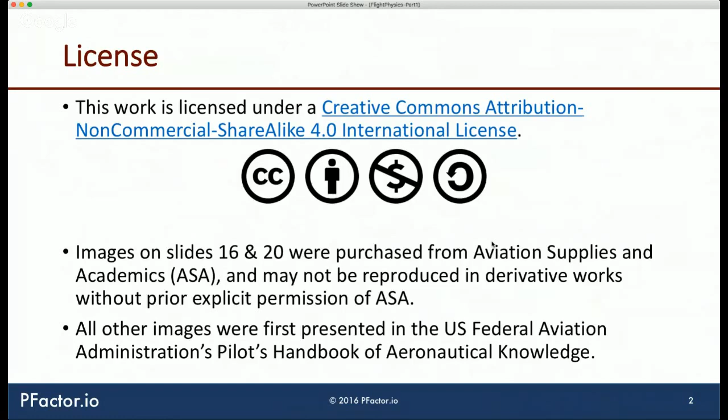All right, so before we get started, a little bit about me. I'm a Los Angeles area-based resident, originally from India, commercial pilot and AGI, also working on my CFI. Hopefully in the next quarter or so I should have my CFI. Been an av geek, huge fan of airplanes, flying, and aviation for as long as I can remember. My dad used to work for Indian Airlines, and growing up I remember actually going to the airport. In those days you could walk up on the tarmac to the aircraft, and I remember smelling burnt jet fuel. Even to this day, when I smell jet fuel, it has a nostalgic memory to me. It's kind of weird, but that's the way it is.

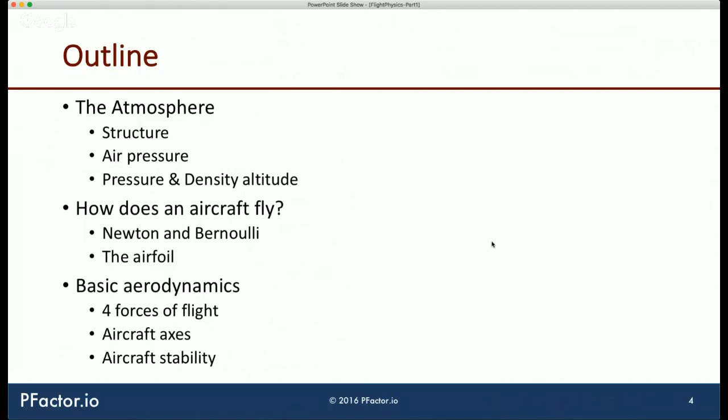So what is the atmosphere? And before we answer that, maybe there's a bigger existential question here. I'm a Star Wars nerd, so you're going to see a lot of Star Wars stuff popping up, bear with me. There's this big statement that Obi-Wan Kenobi said in Episode 4, where he says something like, 'The Force is an energy field created by all living things. It surrounds us, it penetrates us, and it binds the galaxy together.' Sometimes, rather irreverently, I wonder if he's just talking about air. Because air actually surrounds us and penetrates us, and maybe it doesn't bind the galaxy together, gravity does. But at the end of the day, air is all around us.

So let's talk a little bit more about what air does, what the atmosphere is all about. The atmosphere itself is an envelope of air that surrounds the Earth, and it rests upon the surface of the Earth. The atmosphere, or air, is a mixture of gases, predominantly nitrogen and oxygen. The air is about 78% nitrogen, about 21% oxygen, and about 1% all other gases. At least the FAA figured out how to add all of these up so it totals 100%, which is pretty cool.

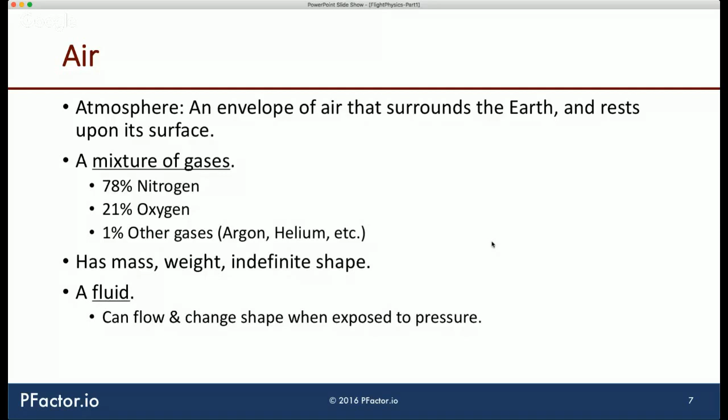All right, so continuing on. Because air has mass, it exerts a force. And because it's a fluid, this force is exerted equally in all directions. That force over a unit area is called pressure.

When you're filling up your car tires, you normally fill them to, say, 32 psi, and psi is a unit of pressure — pounds per square inch, a force per unit area. The same way, pressure exerted by the air is measured in a unit known as inches of mercury, or in millibars.

So what exactly does inches of mercury mean? Let's talk about that. The earliest measurement of atmospheric pressure was by this guy called Torricelli, an Italian inventor, who realized that by sticking a capillary within a fluid, the pressure exerted on that fluid by the atmosphere forces the fluid into the capillary to a certain height.

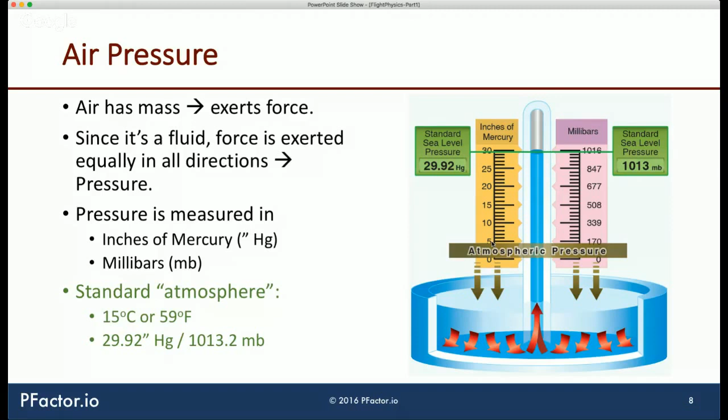So just remember: air at sea level, 29.92 inches of mercury, 15 degrees Celsius. All right, so some rules of thumb.

We all know this instinctively: as we climb higher in altitude, the temperature of the air surrounding us goes down, and the pressure of the air also goes down. Air pressure goes down because there's less air above us — the higher you go, the less air there is, therefore less weight or mass impacting us, which means less pressure. These are two rules of thumb that are very common and should be memorized. It's not very difficult, so it's easy to memorize.

The standard temperature lapse rate is 2 degrees Celsius for every 1,000 feet in altitude. In other words, let's say we're at sea level on a standard day and the temperature is 15 degrees Celsius. Climb 1,000 feet, and the standard atmosphere is expected to be at 13 degrees Celsius, 2 degrees Celsius less. At 5,000 feet, the standard atmosphere air should be at 5 degrees Celsius, and at 10,000 feet it becomes -5.

So just keep 2 degrees Celsius for every 1,000 feet in mind. The standard pressure lapse rate is 1 inch of mercury for every 1,000 feet. So it's fairly easy: temperature goes down 2 degrees for every 1,000 feet, pressure goes down 1 inch for every 1,000 feet. So once again, if air at sea level is at 29.92 inches of mercury, at 1,000 feet the air should be exerting a pressure of 28.92 inches of mercury. Just memorize these numbers — you're going to use these.

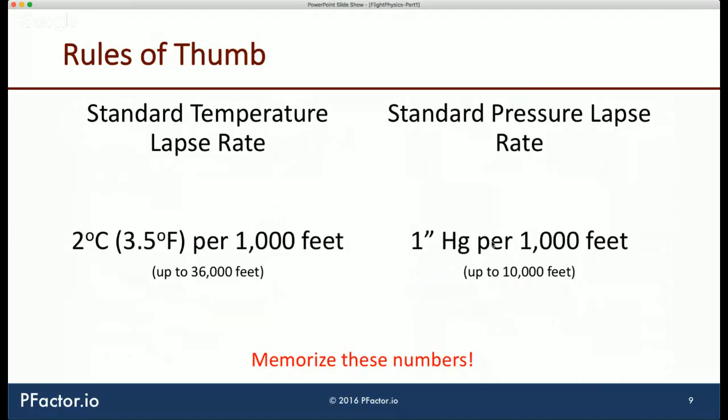All right, so we're going to dive into a couple of concepts. I'll talk about them briefly today. I suspect we might cover them in more detail when we get into aircraft performance, maybe 4 or 5 sessions down the line. But let's talk about these today because the next slide, density altitude, is more relevant to our discussion.

In aircraft performance, or talking about the atmosphere and air, there's a concept called pressure altitude. That's really the height above a theoretical level called the standard datum plane. There is no standard datum plane in the world — you won't walk around the Earth's surface and find it. It's a theoretical, imaginary level that someone made up. The standard datum plane is a point at which the atmosphere exerts a pressure of 29.92 inches of mercury.

Depending on how atmospheric pressure changes — which could be above, below, or at sea level — it's rare that at sea level conditions are exactly standard. In fact, it's more common that they're not, because of what's happening in the atmosphere above us. We talk about low pressure and high pressure, and depending on conditions on a given day, it's possible that the standard datum plane moves.

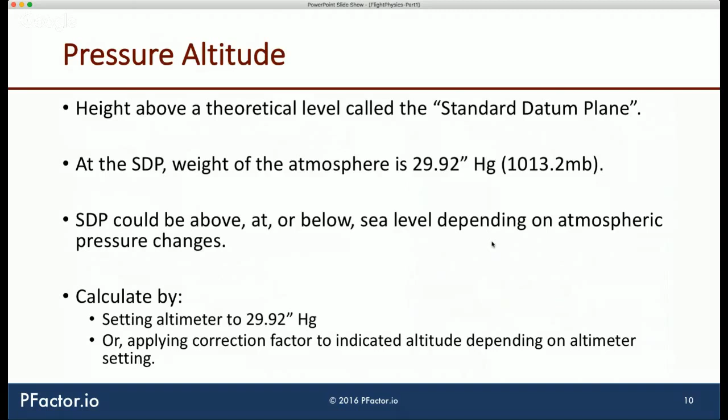The easiest way to calculate your pressure altitude is by setting your altimeter inside the aircraft to 29.92 inches of mercury, or 1013.2 hectopascals. The other way is to apply a correction factor to the indicated altitude depending on the altimeter setting. We'll cover this in pilot math or performance math, whatever that session is called — just keep this in mind, I don't want to delve into it too much today.

The reason pressure altitude is important is because it's used as the basis to calculate something called density altitude. I'm going to talk about density altitude because it can get a little confusing, so let me explain it in more detail.

The density of air varies with temperature, humidity, and pressure, and by the largest extent it varies with temperature. The hotter it is than standard temperature, the less dense the air — it's thinner. The colder it is than standard, the more dense the air becomes — it's thicker or heavier. So air that's hotter than normal is less dense, and air that's colder than normal is more dense.

This change in air density impacts how an aircraft performs. Less dense air makes the aircraft perform worse — power is reduced because the engine takes in less air. Less dense air means fewer molecules per unit volume, so as the aircraft flies, the engine takes in less air and there's less thrust. Think of the propeller as trying to bite through this fluid called air — as the air gets thinner, the propeller becomes less efficient. Finally, lift is reduced because thin air exerts less force on the airfoil.

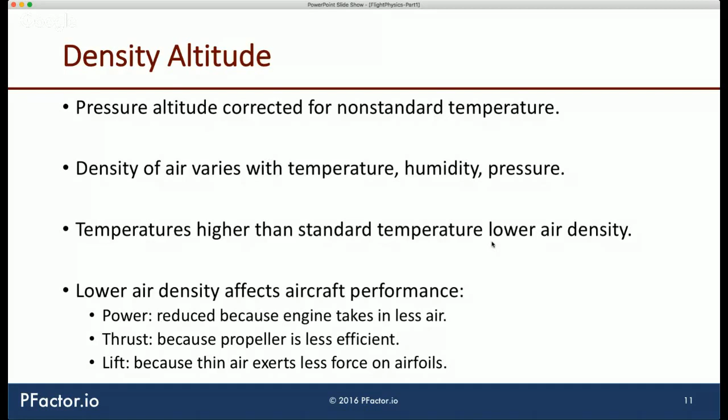All right, so that brings us to the end of this whole thing about the atmosphere. Now that we figured out what air is all about - the fact that it has a density, it exerts a certain pressure, and the hotter it gets, the air actually exerts less pressure and is less dense, which affects performance - we've kind of covered all of this.

So let's talk about how an aircraft flies. In the old days, it was probably just magic, but whatever it is, an aircraft flies a certain way, and an aircraft flies by generating lift.

This is a meme that's been making the rounds on the internet for a while. It comes from a gym meme with all these pictures of really buff, bulky guys lifting weights, making fun of a scrawny little guy, kind of like Screech from Saved by the Bell. It's the same thing here - a gigantic aircraft looking at a small one saying, do you even lift? And sometimes I wonder.

I fly a little Cessna, not a 152 like this one, but a 172. And I wonder, how does it generate lift? What is this thing and how does it fly? I know a lot of people have this question. I have friends who have expressed severe doubts that an aircraft should even be flying at all - it just feels unnatural to them.

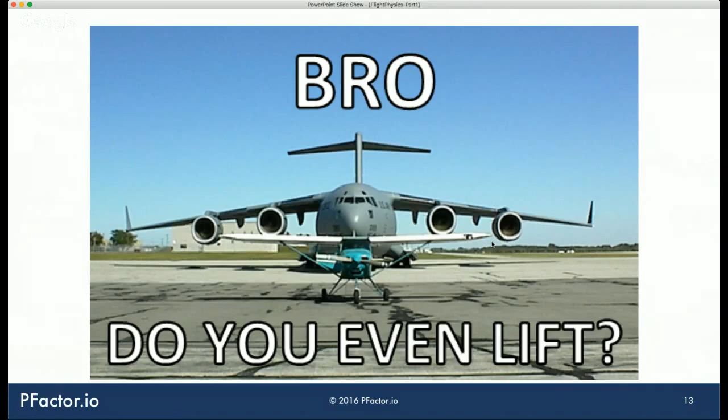So how does an aircraft generate lift? Before we talk about how it flies, let's talk about what makes it fly. The main component of an aircraft that makes it fly is this thing called an airfoil. The airfoil is basically a shape that, when it moves through a fluid or through air, causes the generation of an upward force that's called lift.

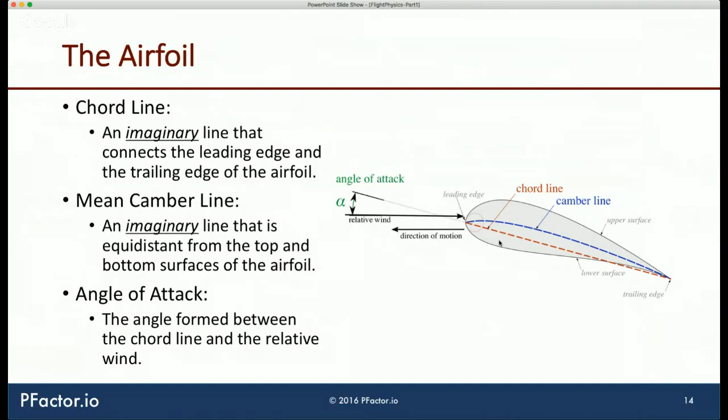It's imaginary, it helps characterize what the airfoil looks like. The other imaginary line people typically use when referring to airfoils is called the mean camber line. The camber is how curved the airfoil is, and the mean camber line is an imaginary line that's equidistant from the top and bottom surfaces of the airfoil. In general, the higher the camber of the aircraft, the more lift it generates, so the higher its coefficient of lift. Just keep that in mind.

These two definitions typically come up on the test, or at least one of them. The chord line invariably shows up on the test, or at least your DPE will probably ask you this on your check ride, so keep that in mind.

Now, as the airfoil moves through the air, there's a certain direction of motion it has. In this case, I've got the airfoil moving horizontally from right to left. The wind that hits the airfoil is parallel to the direction of motion, but in the opposite direction. So if the airfoil is moving right to left, the wind hitting it is effectively flowing from left to right.

That wind is called the relative wind because it's relative to the direction of motion. The relative wind is always parallel to and in the opposite direction of the aircraft's direction of motion. So if the aircraft's climbing, the relative wind comes from the top. If the aircraft is descending, imagine the relative wind hitting the wing parallel to the direction of motion, but from the bottom.

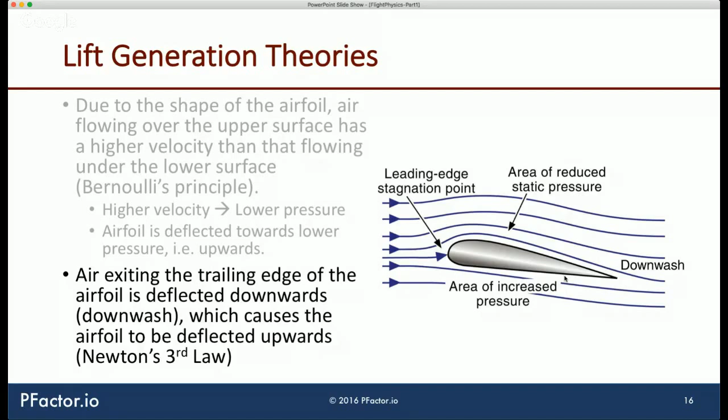All right, so we've kind of covered everything we needed to about lift, at least as it pertains to a private pilot syllabus. There's not a whole lot of difference actually between this and the commercial syllabus, but just wanted to let you guys know.

So let's continue into aerodynamics, which sounds really big and all of that, but the reality is we're talking about the forces of flight and how they impact flight.

So there are four forces of flight. We've already looked at one, which is lift, and that's the upward acting force that opposes the weight of the aircraft. The weight of the aircraft, there's not a whole lot to talk about. It's the physical weight of the aircraft, its occupants, its fuel, and everything else.

So the aircraft typically has a certain weight. When you put people into it, it has more weight. When you add fuel, it has more weight. All of that together is just called the weight of the aircraft.

Important to note that the weight of the aircraft is always presumed to act through a point on the aircraft called the center of gravity. The same way, lift on the aircraft is presumed to act through a point on the airfoil or the wing called the center of pressure or the center of lift.

All right, so then the other two forces. We talked about the vertical forces, the horizontal forces. So we have thrust, which is the force that causes forward motion of the aircraft, typically generated by the engines or the propeller, and this results in airflow over the wings.

And then there's drag, which opposes the forward motion of the aircraft. That's a real drag, though. Sorry, I couldn't resist that joke. I had to make it. But the fact is, drag is a rearward force that opposes forward motion of the aircraft.

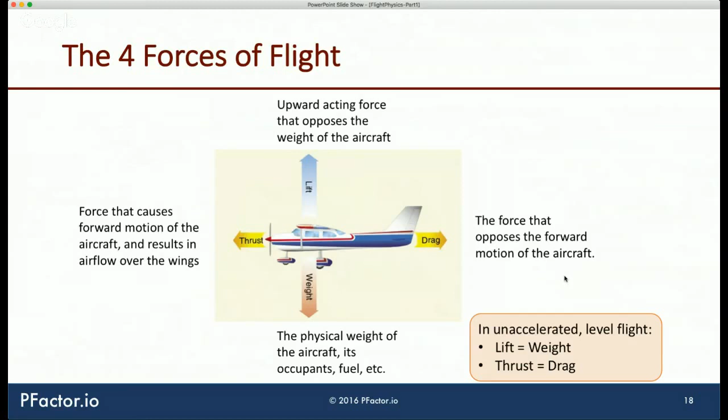All right, so continuing on, and I'm going to speed up a little bit because I can tell that I'm starting to run low on time here. So let's speed up a bit. That's a good point, I was looking at the time saying, okay. Yeah, all right, let's go.

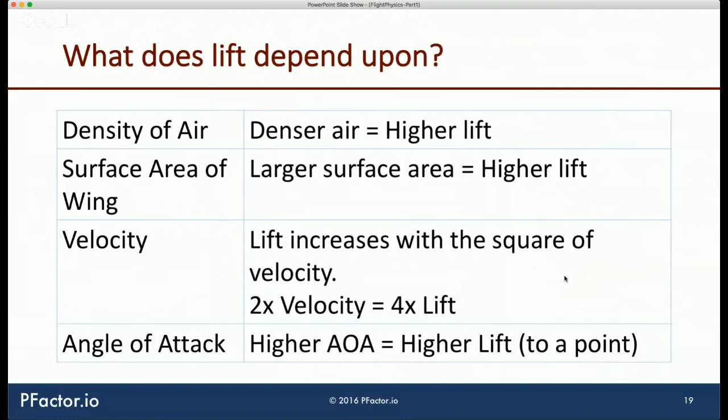So what does lift depend on? And I'm talking about lift here mainly because lift really depends on a few factors: the density of air, we talked about this, the surface area of the wing, the velocity, and the angle of attack. And the higher the angle of attack, the higher the lift, to a point.

It's actually a reduction in lift, not like the wing has lost complete lift and now is down to zero, because if that happens, the aircraft will come plummeting out of the sky. That's not going to happen. There's a small reduction in lift because of that. So remember that a stall occurs at the same critical angle of attack regardless of any other factors, and at this point the airflow is basically separated from the top of the airfoil.

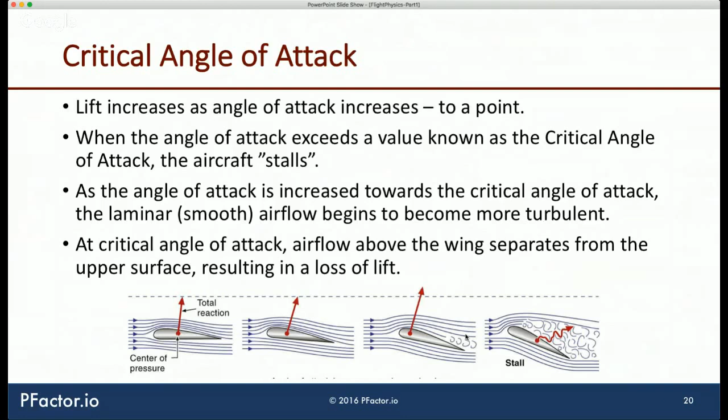Now the other force we want to talk about—we've already talked about weight, and thrust we'll cover in another presentation about the propeller and things like that. So let's talk about the other force that impacts an aircraft: drag.

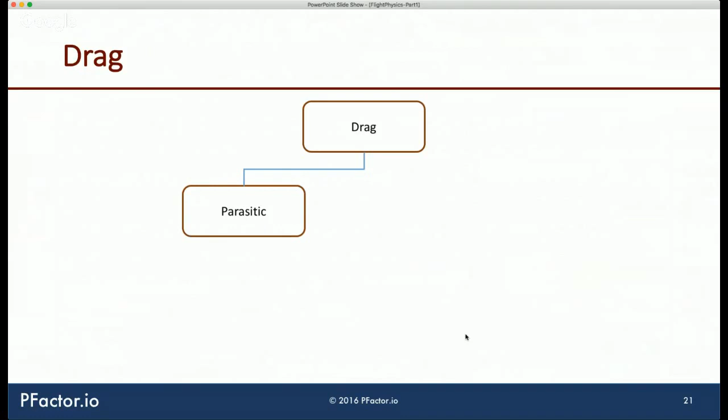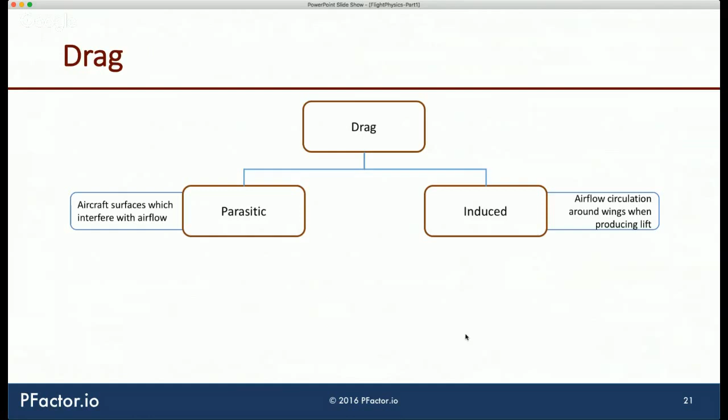Drag is a rearward acting force, and it has two components. There's parasitic drag, which is caused when the aircraft surfaces interfere with the airflow. And there's induced drag, caused by airflow circulation around the wings when lift is produced. Induced drag, in a way, is a byproduct of the production of lift itself.

Parasitic drag itself has three parts. There's form drag, which is due to the shape of objects that protrude into the wind. A typical general aviation aircraft has all kinds of things that protrude into the wind—we have the wings, obviously, but we need those, and we also have the landing gear. In many aircraft, the landing gear has a fairing on it, something very streamlined in shape, to minimize form drag, because the more streamlined the shape, the less drag it causes.

There's interference drag, which occurs when varied currents of air meet and interact. For example, there's air flowing over the wings, but also air flowing over the fuselage, and small eddies form when the air at the wing root meets the air flowing out of the fuselage, causing a bit of drag. It's called interference drag—air that's interfering with each other.

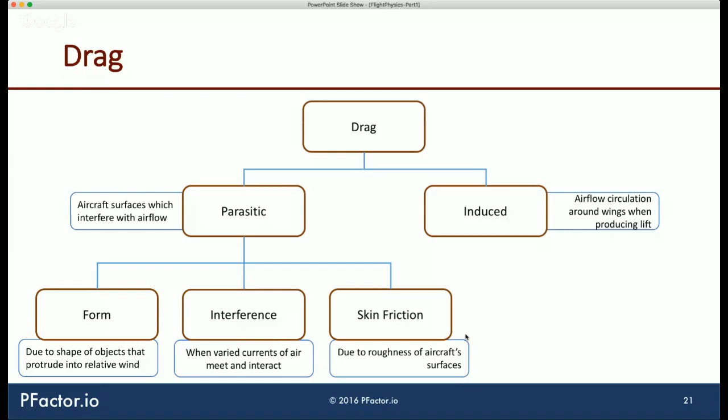And finally, skin friction drag, which is due to the roughness of the surface. Any surface, no matter how smooth, has a certain amount of roughness due to inherent friction and molecular level imperfections—that's what skin friction drag is about. So again, induced drag is a byproduct of the production of lift.

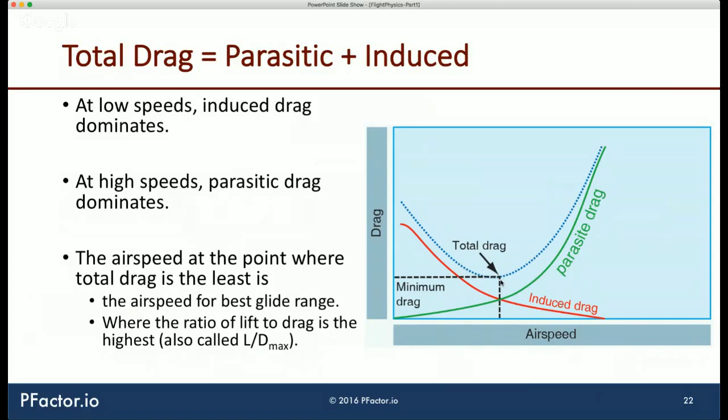This is the airspeed at which you get the best glide range. If you look at your pilot's operating handbook, many times it says that as soon as you have an engine out, pitch for best glide. Best glide is basically when total drag is the least. Typically, in my Cessna 182, it's about 79 knots—there's a certain number in your pilot's operating handbook. So keep that in mind.

All right, so we're done with the four forces of flight—we talked about lift, drag, and we know what weight and thrust look like. Let's talk about what makes an aircraft stable, because this is important as we study further. An aircraft is inherently stable, or most of the GA aircraft we have are inherently stable, because if they weren't, they would be horrible to fly.

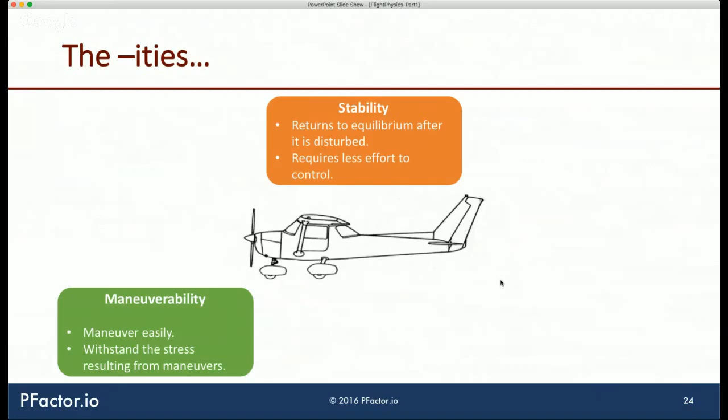Before we get into what stability means, there are what I call the three -ities. There's stability, which is the tendency of an aircraft to return to equilibrium after it's disturbed—you push the nose down, and the aircraft tends, as soon as you release the yoke, to come back to level flight attitude. There's maneuverability, which allows the aircraft to be maneuvered easily and withstand the stresses that result from these maneuvers.

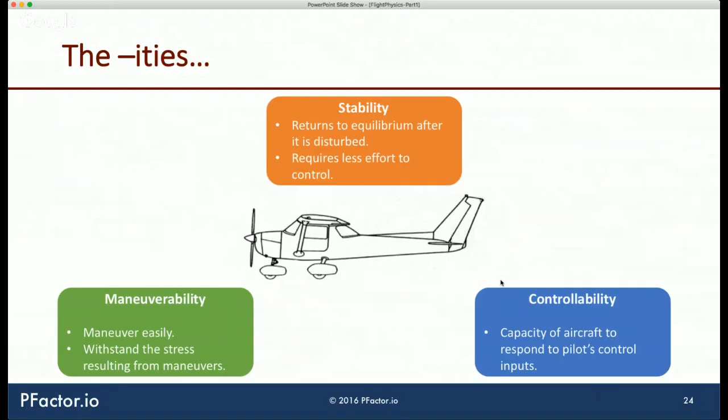There's controllability, which is the capacity of the aircraft to respond to control inputs. So if an aircraft can basically do a snap roll as soon as you turn the ailerons, that means the aircraft is more controllable than another aircraft like a Cessna that might take longer to turn.

Stability of an aircraft is expressed along three axes. This is common knowledge, so I'll quickly run through them. There's a pitching axis, where the nose and the tail basically go up and down along an axis parallel to the wings, called the lateral axis of the aircraft. The pitching moment is controlled by the elevator. You pull the yoke towards you, the elevator goes up, causing the aircraft to pitch up.

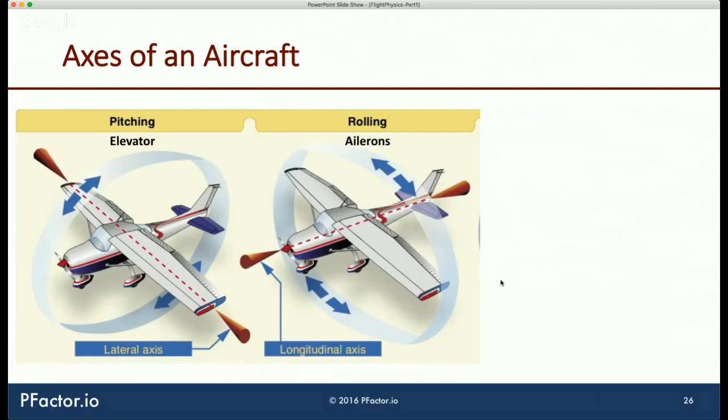You push the yoke away from you, the elevator goes down, causing the nose to go down. There's a rolling moment, affected by the ailerons. That rolling moment is around the longitudinal axis, an imaginary line that goes from the nose to the tail of the aircraft. The rolling moment is when the wings turn towards the right or the left, depending on how you rotate the yoke. Finally, there's the yawing moment, the motion of the aircraft about the vertical axis, which is a line starting at the top of the aircraft all the way down and out at the bottom. The yawing moment is what makes the nose turn left or right when you move the rudder.

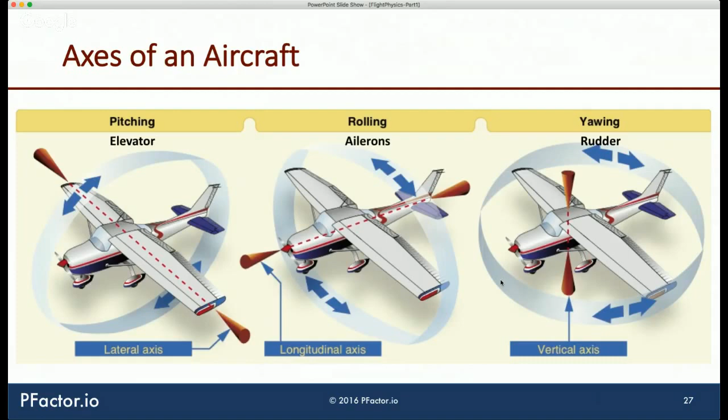Now, there are two types of stability we always worry about. The first is static stability, the initial tendency of an aircraft to come back to equilibrium. In other words, you push on an object, and if it immediately wants to come back to its initial resting place, that is called static stability. Dynamic stability, on the other hand, is the tendency of an object to come back to equilibrium after a period of time. So you push an object, it wobbles around, and eventually it comes back to rest. That is what we call dynamic stability.

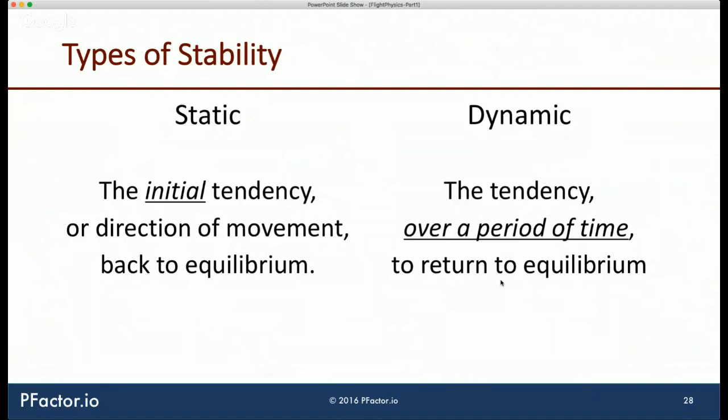Now if you lay the glass on its side and try to push it, the glass basically rotates about an axis and ends up at a point, but it's never going to try and come back to that initial position just because of the way it is. We call that neutral static stability, because the object isn't coming back to its original position, it's staying at the position to which it was displaced.

Finally, let's say you've got a glass with a narrow bottom and a really wide top, and you push on that glass — most likely it's going to wobble, but most likely it's going to tip over. That we call negative static stability. In other words, the object does not even want to come back to equilibrium. It has a tendency to diverge from equilibrium and go to a completely different state. It doesn't even want to try and correct itself, and it goes to a state that's unstable.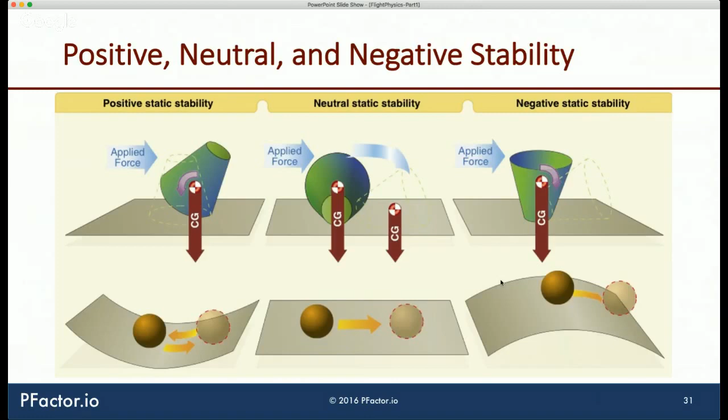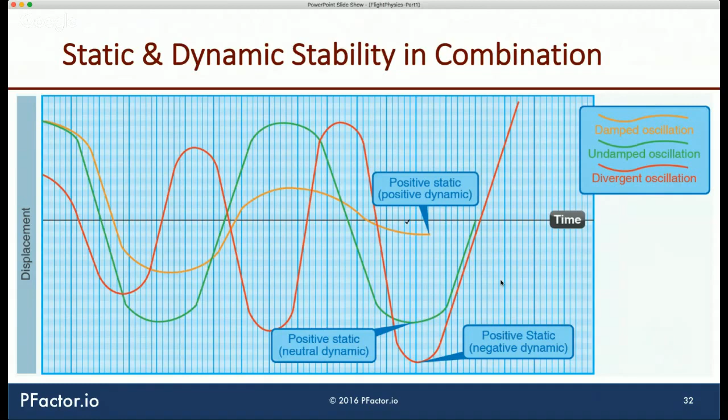So a combination of these two things — we can talk about static and dynamic stability. The reality is most aircraft are built to have what we call positive static and positive dynamic stability. In other words, when you disturb them from equilibrium, there is an immediate tendency for them to come back to equilibrium. But even if that tendency causes some oscillation in their movement, over time that oscillation gets dampened out. You can observe this often in aircraft, especially GA aircraft, where if you push the yoke forward and release it, the aircraft will oscillate a little, going up and down for a few minutes, and then eventually it comes back to a level flight attitude, same airspeed and all of that. Ignore the fact that it's a complicated looking graph, but that's basically what it's saying.

So there are three types of stability, one along each of the axes of the aircraft: longitudinal stability, lateral stability, and directional stability. Longitudinal stability is stability around the pitching of the aircraft and is probably the most important.

What that means is when the aircraft's nose is pushed down or up, there's a tendency for the aircraft to come back to a level flight attitude. It's determined primarily by the position of the center of gravity with respect to the center of pressure, or center of lift. We'll explore this further in another session, but for now just remember that the center of gravity and its relative position with regard to the center of pressure or center of lift is what determines this.

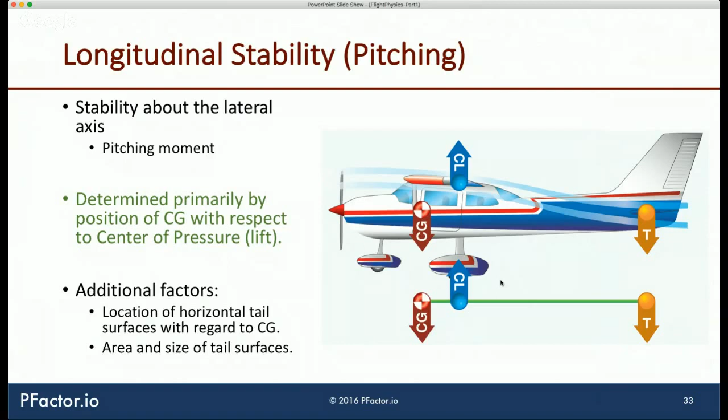And what helps in longitudinal stability is the horizontal stabilizer. So we've got the wings that generate lift, and the horizontal stabilizer that basically aids in longitudinal stability. The way it does that is by generating a load on the tail, or on the empennage of the aircraft, depending on the airflow that flows over it.

Now let's say a gust of wind forces the nose of the aircraft upwards, so the speed starts to come down. What automatically happens is that because the airflow over the horizontal stabilizer goes down, it has a tendency to reduce the load it generates, or generate less load. Because there's less load, the aircraft now is going to try and push the nose back downwards, thereby accelerating and trying to return back to that level, the same speed and a level flight attitude.

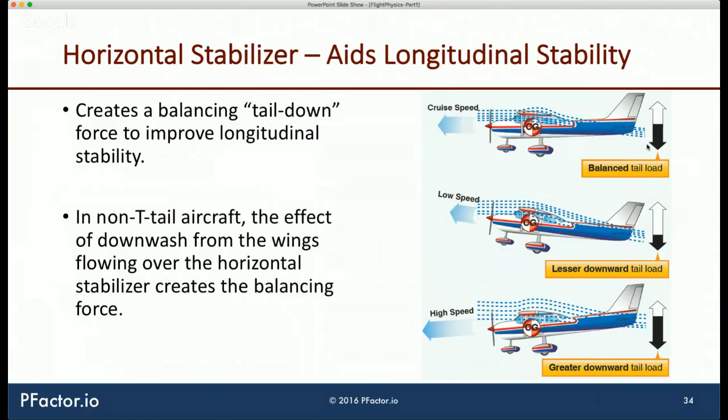Now rolling - that's lateral stability, which is around the rolling axis. This is when the wings are turned to the right or left by the ailerons or by a gust of wind. There is a certain stability there in the aircraft too - you'll find that the aircraft tends to want to return to a level flight attitude.

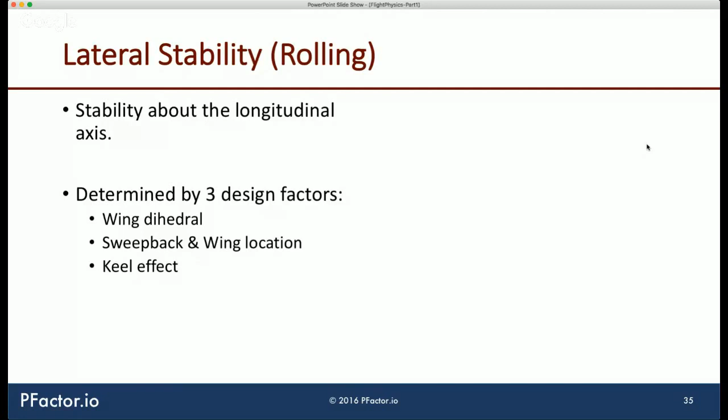It's determined by three design factors, but the one we'll talk about most right now is what's called the wing dihedral. If you look at most aircraft, you've probably wondered, especially in low-wing aircraft, the wings are basically not horizontal - they are inclined upwards at a certain angle from the horizontal plane. That angle or inclination of the wings upwards is called a dihedral.

When that happens, the wing on the left, the descending wing, essentially now has an increased angle of attack because of the dihedral, and so it has slightly increased lift than the ascending wing on top. The increased lift on the descended wing now tends to roll the aircraft back out of that bank, back to a level flight attitude.

So again, what you really need to understand is that dihedral helps with lateral stability. That's really the key point I was trying to make.

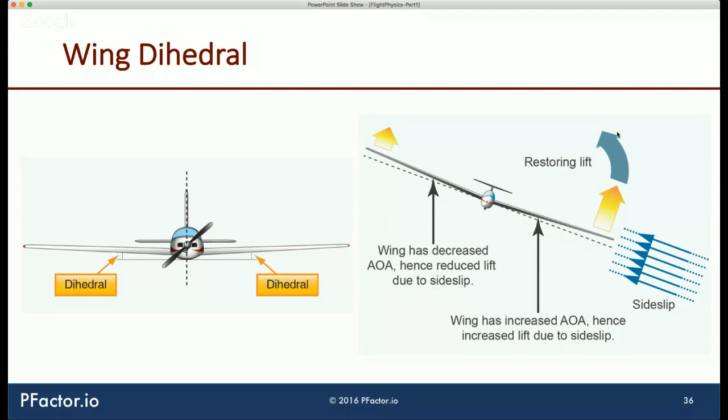Finally, let's talk about directional stability, which is stability around the yaw axis, or the vertical axis. This is really determined by the tail. Let's assume we're flying along and a gust of wind hits us from the right-hand side of the aircraft, and it tends to turn the nose towards the right. So the tail gets deflected left, and the nose is now going to turn right.

Because of where the vertical stabilizer, or tail, is located, the wind that hits the tail is now coming at a slightly different angle, and that causes a yawing moment where there's a little more force generated that pushes the tail back towards the right and the nose towards the left, trying to bring the aircraft back into equilibrium.

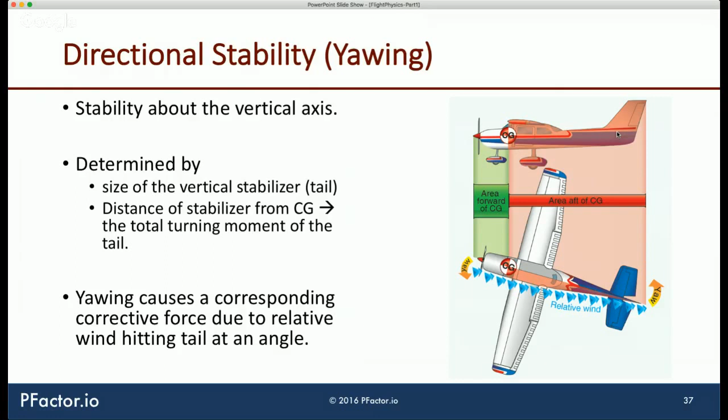So that's all I have here. I'm going to wrap up in a couple more slides. We've got a few more minutes, so let me try and wrap this up.

So what did we cover so far? We talked about the properties of air, what a standard atmosphere is, pressure and density altitude. We discussed temperature lapse rate and pressure lapse rate, so keep those in mind. We talked about how an airfoil produces lift, the four forces of flight, and the types of drag.

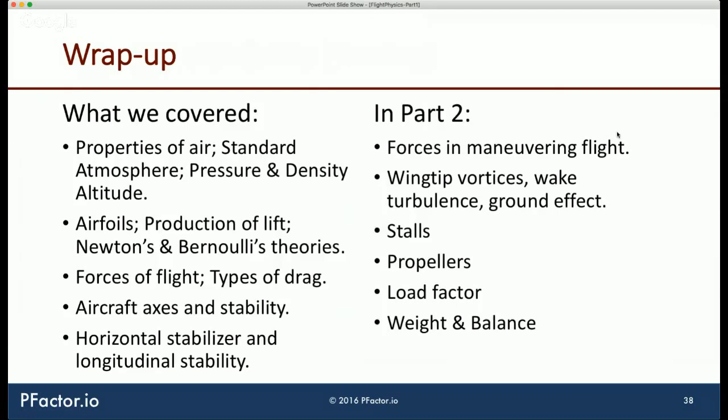And we talked about how the aircraft tends to be stable about different axes. So we covered a lot today, and there's a lot more to go. In part 2, on Tuesday, I'll be talking about the forces in maneuvering flight. We talked today just about level flight, so what happens when you're turning, climbing, and descending? We'll talk about propellers, stalls, load factor, and a few other miscellaneous items. And finally, just the next steps.

If you're really interested, please review the Pilot's Handbook of Aeronautical Knowledge. There's a new version that came out in 2016, just a month or so ago. So please review that. The chapters 4 and 5 are from that new book, not the older version. If it's the older edition, I think it's chapters 2 and 3 - they changed the chapters around a little bit, so it's like one-off.

And then just prepare questions for the next session. We'll attempt to have a short Q&A.